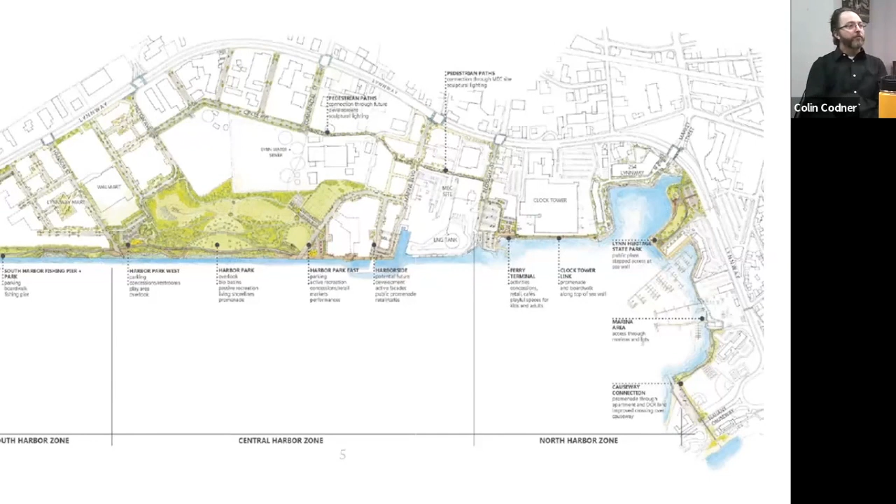Could you go all the way to the Rotary? Yeah, this currently exists. What's the status with the bike path, the Northern Strand, whatever it's called?

The rail trail portion is complete to Western Ave. The design plans for the on-road portion, which takes you from Western Ave along South Common, down Market Street and Lynnway, are at 100% design phase. Construction is expected to begin around 2020.

There's another spur that goes off down toward Bennett Street, crosses over that bridge, and just stops—it's interesting. I didn't even know this offshoot was here. Is there any opportunity to connect that further? That's also a big idea.

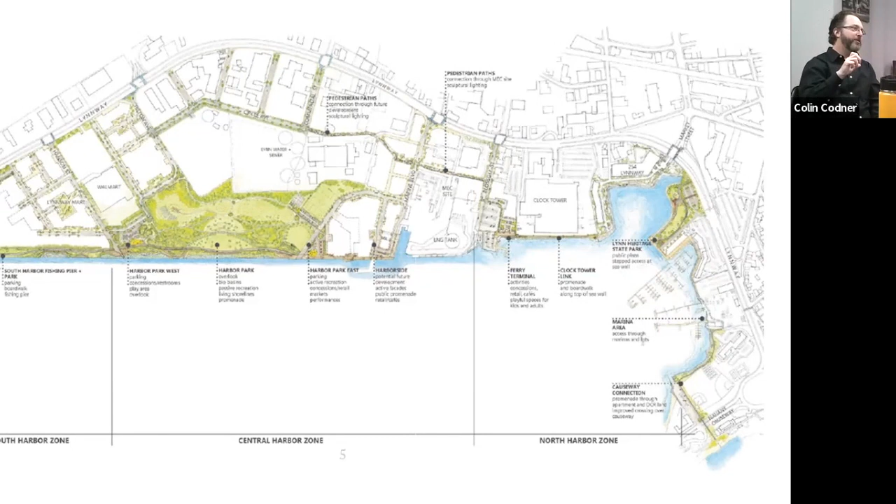The challenge is where to connect it up and then getting it over the MBTA rail line, which is an active rail line, so there's elevation you need to get up and over. But I think you could connect along the water, come back around, and be on a physically protected bike path along Lynnway up Market Street, continuing all the way down to the casino if you wanted.

It's not tracking the Saugus River, for example—well, it crosses by Saugus Boston Street, and it does track the river a little bit in Saugus, maybe a quarter mile when you come across.

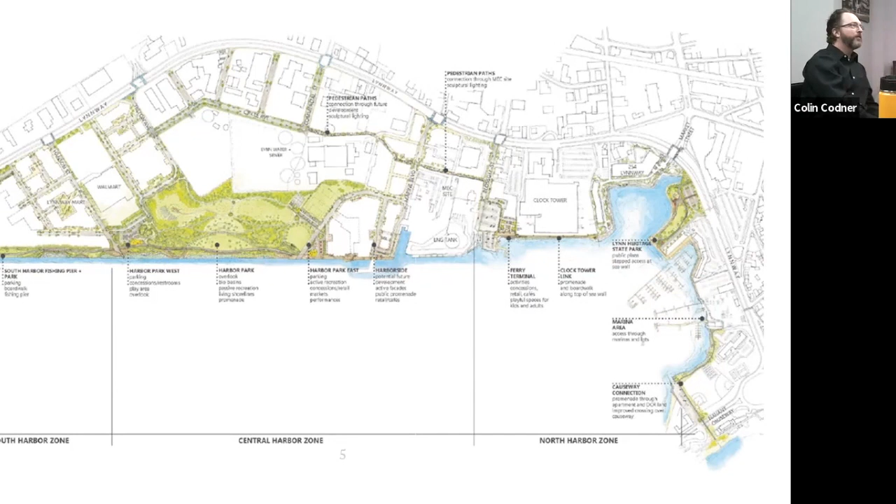Incredibly complex there—kudos, it's amazing. It's been a good project team.

From my perspective, the funding's in place—this project is now going to happen. There are some council votes coming up; we hope to get it into the council probably in February, maybe the second meeting in February.

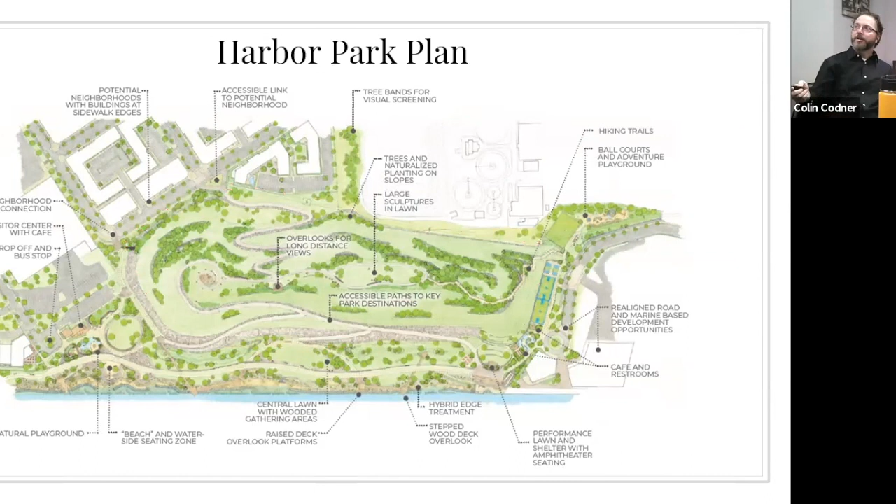I do want to point out, which I failed to do earlier, is to acknowledge their partnership—A.W. Perry, who owns Gorelick, is a pretty important partner to this project. They're going to be essentially sharing an easement to the park, so the little angled area behind the old Gorelick, about an acre, will be given over to the park to allow for connections from the north side. We have some agreement and some work to go through with them to come to final terms—that will be part of the council vote.

Same with Lynn Water and Sewer. They're not providing access, but they're providing space for some of that grading and shaping, which is really important for the landscape piece of this.

One of the things that's hard to grasp in the plans I have up here, hopefully we'll share them at a later date, is that there's a fair amount of landscaping going on top of this. It's not going to be a grassy hill or the typical kind of landfill you picture as you drive by. It's going to be pretty liberally landscaped, so it'll become a nice space. The partnership with Perry and Lynn Water and Sewer really helped facilitate that, because we needed the extra area for it.

Where is the dump where you put the leaves? Is that further up or is this an issue for you?

No, I've got a place on Salem Street where you can. That's the first thing you moved out of there, the DPW? No, this shouldn't affect that. No, that's off Circle Ave. That's on the other side.

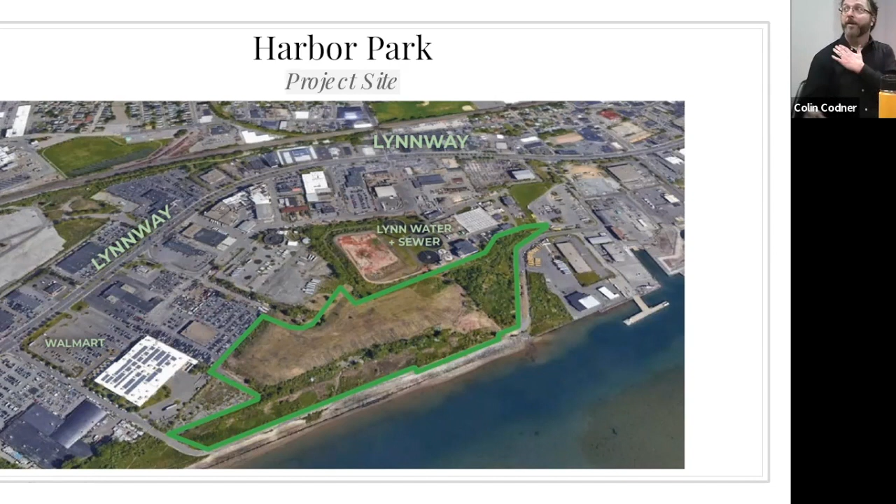It's that far away from it. Yeah, in the short term, as part of the master plan, this right here, that area that's Circle Ave, that's where the leaf dumping is. That's envisioned as a relatively wide boulevard, and that's part of the connection up to Commercial Street.

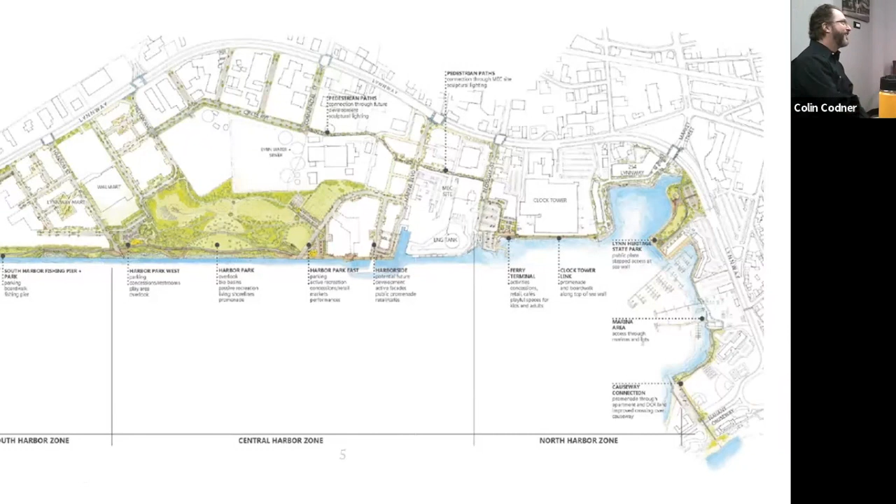I don't know what to say about the leaves at that point. I thought they were closer to the shoreline than they are. So, yeah, you're good for a while.

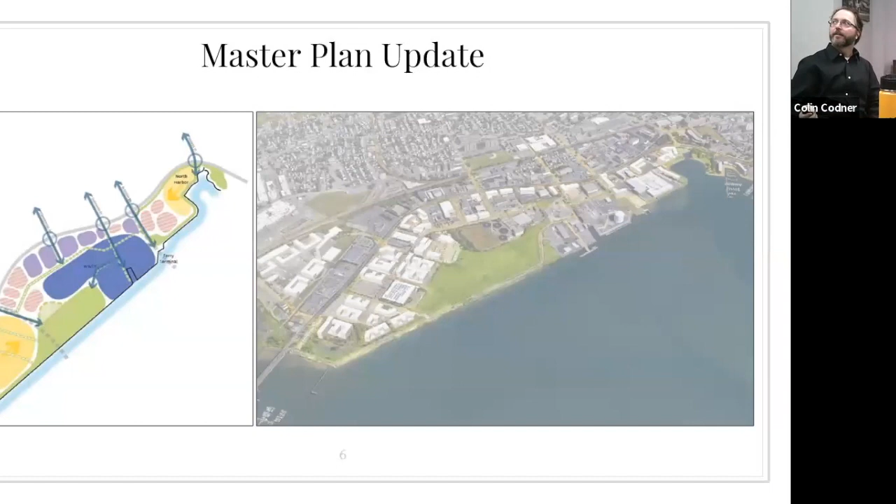Question, if you could go back to the screen with the red box. Yeah, that one. You had talked about the deliverable for the red box area being around 2025, which implies to me that the waterfront area with the walkway and everything is going to be part of phase two. Correct.

I'm not the brightest guy in the world, but it seems backwards that we're going to build the sandcastle before we make the wall to stop the water. And then the other part of that question: you said it was fully funded, but you also said part two is going to be very expensive. So is part two also fully funded?

Phase one currently is just phase one, and the phasing is driven by the cap repair project. The opportunity to create the park exists because the cap had to be repaired. Right now, what's approved for Charter is just a standard cap, a non-woven material on top, a couple inches of soil, then grass. This was an opportunity, while they're doing the repair, to work with them to design a cap that allowed for landscaping on top, adding another 18 inches up to 3 feet of soil for landscaping.

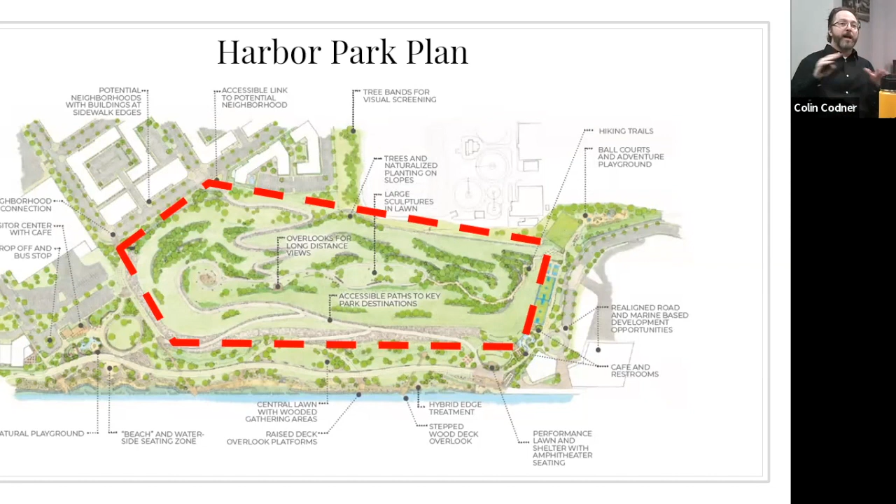So the reason phase one is the landfill is because of the timing. If they were to cap it under their current permit, this project doesn't happen. There's no opportunity to go back and redo that, just from a cost and engineering perspective. So the opportunity is presented by the timing and the willingness of the property owner and Charter to slow down their process and work with the city and state agencies to come up with a solution. That's why the landfill is first.

Phase two then needs to be designed and engineered following that. From a stormwater and resiliency perspective, there's another large riprap piece hardening at the toe, which you can see here along the red dashed area. It's essentially a 30-foot tall riprap area, an armoring for wave action, so the landfill is not in danger of ever washing out.

Our interest in making sure the shoreline stops moving is twofold. If that shoreline continues to erode over decades, it could undermine that. But more realistically for the city, the area between the shoreline and the foot of the landfill is the flatter area and the opportunity for more active uses.

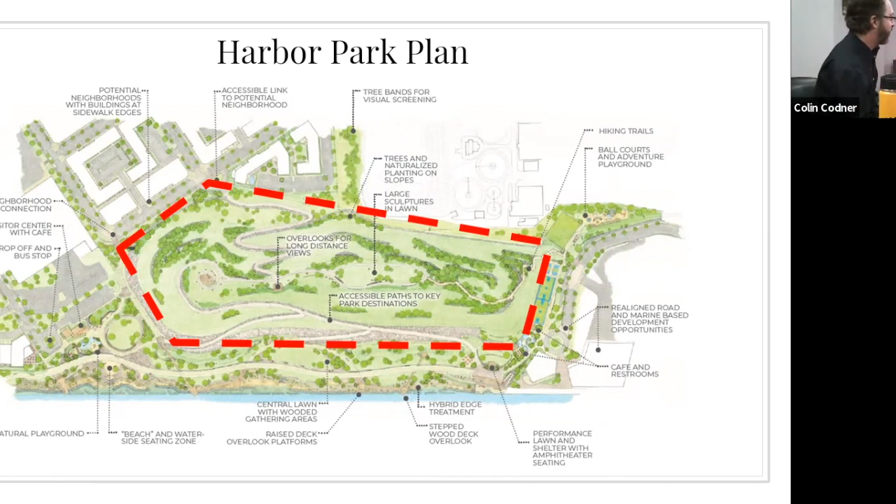On the other slide — on February 9th we're having another public meeting to update a lot of the stuff you just heard. We are looking for feedback on how to program some of the edge uses. On the right side here there's opportunity for active recreational use, and we'll be looking for feedback on what people would like to see there — I think more active, like sports courts, basketball courts. The handball court at the Rotary gets a lot of use.

And then some of the other edge uses, particularly along the waterfront or behind Walmart, could be a place where you'd have a dog park. We probably won't get too deep into programming for that because that's a long-term piece owned by WS Development, who is the landowner of Walmart. So there would be conversation with them about how a redevelopment of their property could contribute to this in the future. But that's several years out. That's why the edges are so important, because that's where you can create some active uses, kind of passive trails.

But also this goes towards making the whole site a destination, so the other side of town. No doubt. Yeah, right.

So I don't have a time yet. It will be a virtual meeting, but February 9th, if you're interested, we can have great opportunities to provide feedback on what you'd like to see around those edges. And I see that we're getting close to 9:30, right?

Yeah, so I did want to hit on some other public infrastructure investments that are helping drive the waterfront vision.

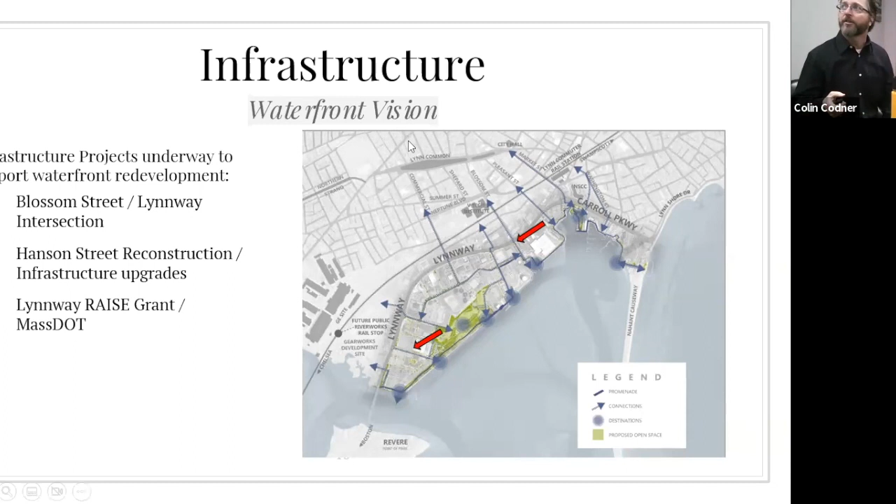Sorry, I'm going to skip this next piece, which was - oh no, I'm not.

I had told you, remember that break along Lynnway where we saw there wasn't a great connection between the Gearworks and the rest of the city? We went after a grant recently to conduct another neighborhood planning process roughly in this area, so that we could take the concepts developed in the waterfront vision, along with some concepts coming out of the comprehensive plan for the Gearworks site, in partnership with Mr. Patsios, to find a way to create a more comprehensive, cohesive neighborhood that ensures the development on the south side of the Lynnway and the north side of the Lynnway are connected and truly a single neighborhood rather than being separated by a big piece of infrastructure.

And how do we invest in public infrastructure like the flag stop at Riverworks, the MBTA commuter rail? How does that become a key driver for redevelopment on the Gearworks site? How does the Lynnway as a new multimodal corridor connect those two redevelopments? And what is the right land use mix and redevelopment strategy there, getting into some more detailed infrastructure investments needed to carry that out? So I would expect that planning process to kick off probably around summer, so just stay tuned with that.

The last point I want to make is that the comprehensive plan is advancing. We're getting to the more interesting part. We've got a vision in place, and we had a lot of community engagement to help us understand what that vision is. There's a good existing conditions analysis on the website right now at lincommon.com. It's over 200 slides of data, and it was really helpful for us to think about what the vision is and what the strategies are.

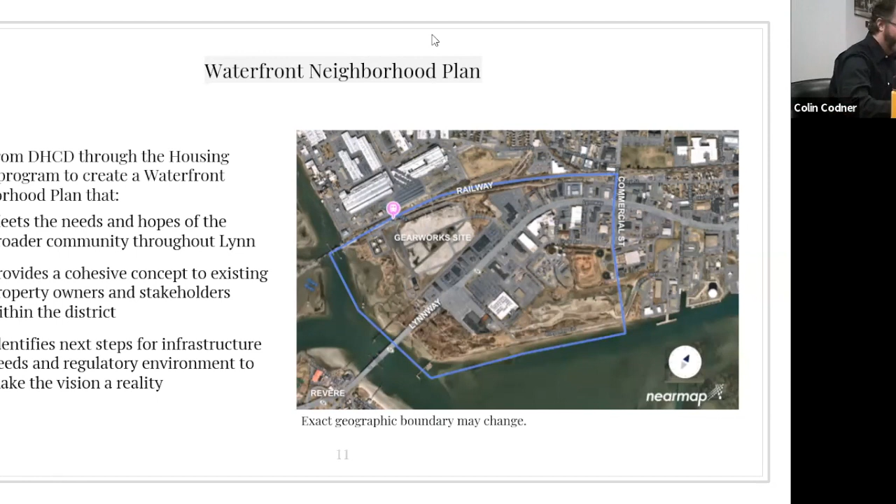If anybody wants a sense of what the park would be like, Councilor Walsh took us all out at various times on his boat to Spectacle Island, where you can dock up and walk around, and the views are unbelievable. That gave us a sense of what this could be - not necessarily accessing by boat, but just being up there, the views are spectacular. If you have a boat and can get out to Spectacle Island, it's really a cool spot.